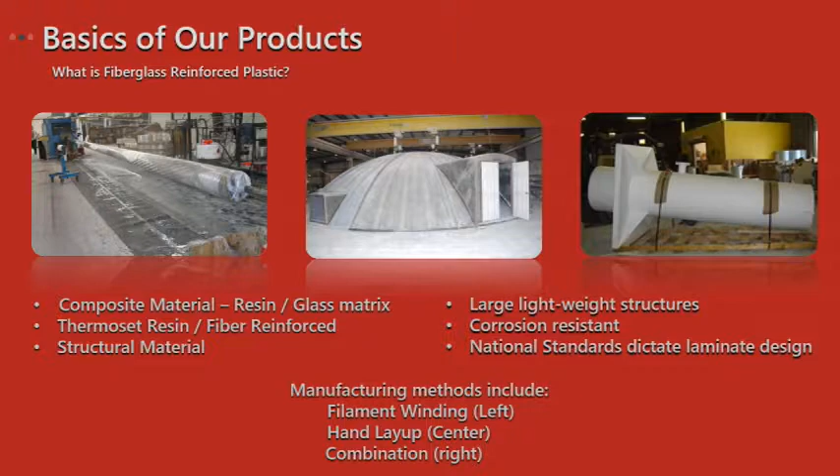The photograph on the right is of a combination of the two. You've wound your pipe, which becomes a stack, and you have a hand layup operation which has created the curbing and gusseting for the same.

Thermoset plastics essentially are resins, as we talked about. There are 5 families basically of resins: phenolics, epoxies, acrylics, isophthalics, which are polyesters, and vinyl esters. Vinyl esters are typically what we will be looking at using on most projects.

The reason for that: vinyl esters are very, very good in terms of structural capacities. They're durable, they can absorb a lot of punishment. They're lightweight, and they give you that lightweight to strength ratio.

Of course, two things you always have to specify in a spec or in any project: whether there are temperature considerations or a fire retardancy that's necessary. The reason for that is we will have to take a look at what resin should apply and be used for any given scenario or situation.

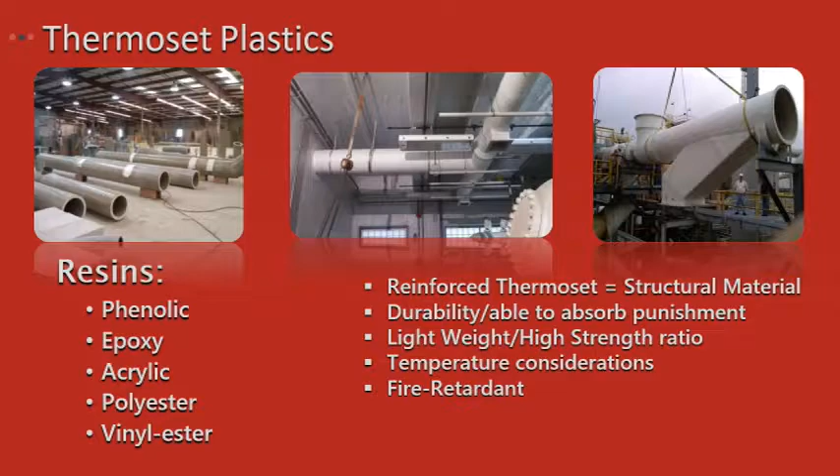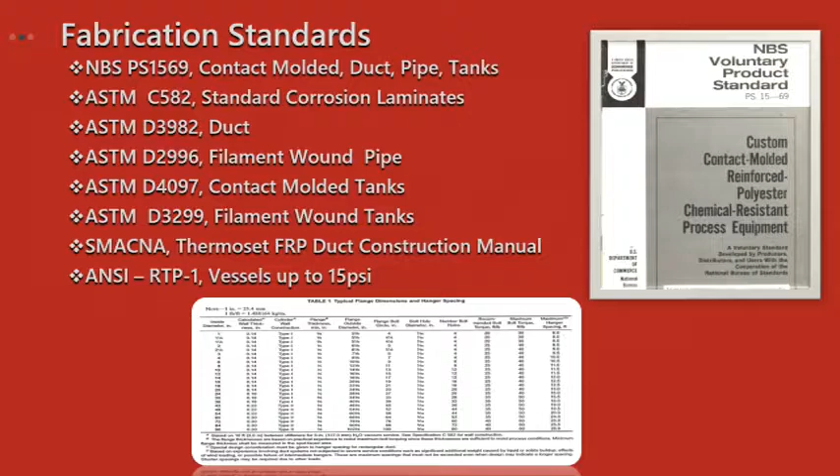Fabrication standards - as I said before, we build all of our products to national standards. The oldest being the NBS PS 1569, which was essentially an all-encompassing standard for fiberglass ductwork. The ASTM C582 is the most general of the ASTM standards relative to fiberglass. From there you get into more specific and specified situations and conditions that the standards address, whether it be tanks, ductwork, etc. One of the latest standards we build to is RTP1 for vessels.

Laminate construction. Laminate construction is comprised of two parts, a corrosion barrier and structural layers. The corrosion barrier is essentially made up of a veil, which is resin rich to the point of approximately 95%. Then that's backed by 2 layers of chopped strand mat, which again, you're looking for a resin rich surface.

So you're going to add 75% resin to 25% glass in those layers. That resin rich surfacing is going to protect your fiberglass from the chemical environment that's inside of the tank or the ductwork. Now, you may also, depending on the chemical, have more layers of veil added, but that typically will not be the case.

The structural layers are typically a 60-40 mixture of resin to glass, and you will usually have chopped strand mat, if not all the way through it, certain layering, and then added layers of either a woven roving, a 24 ounce in most cases, or a unidirectional glass. That's applied if you need strength in a single direction, as with a stack.

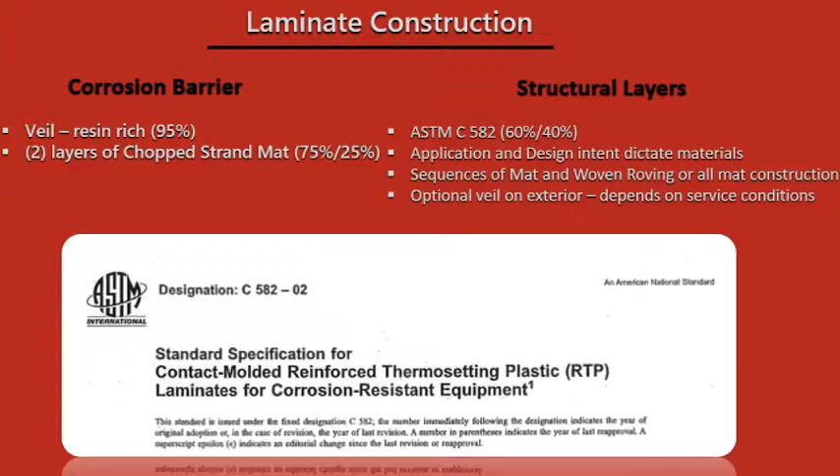Types of projects and sources.

What we typically look for are markets such as water, wastewater areas for municipalities, chemical and manufacturing plants, and acid plants on the industrial side. We also try to look for pulp and paper opportunities as well as food. Food's a little tougher, there's far greater requirements associated with that. However, if you have any of these types of markets open and available to you, typically you'll be able to find some type of fiberglass product that they will be periodically needing.

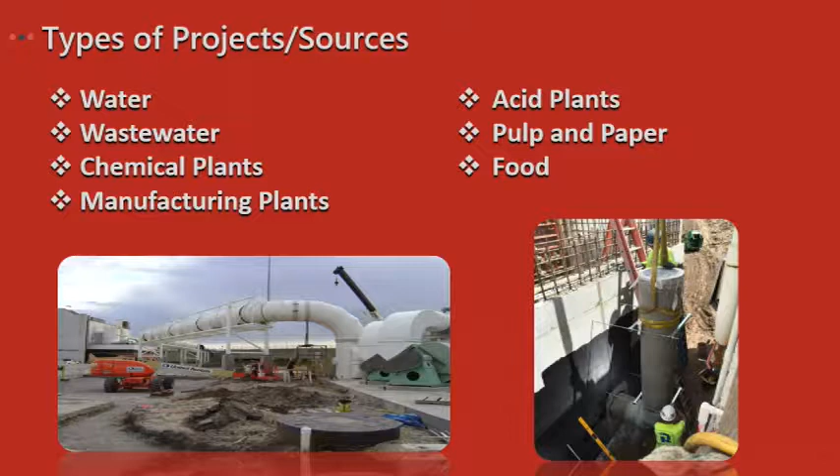The photos below are both of a wastewater treatment plant. The photo on the left is of the Des Moines wastewater treatment plant. That's 5-foot diameter duct that rises up and turns and runs horizontally through a bridge work. Those are 20-foot sections that are flanged and have flex boots attached to them, which allows the duct to grow and shrink depending on the temperature extremes. That duct was put in approximately 11 years ago, and it still looks as good today as it did the day the contractors installed it.

Contacts. As with most things in life, it's not just who you know, but also who knows you. What we're talking about are those relationships you may have with engineers or contractors where they know and trust you, believe in your company, and believe in your product lines. Those are the type of relationships Minoxidant wants to encourage and utilize for the sale of our products. If you have those relationships in place, it's much easier to have knowledge of any upcoming projects before everybody else does.

So what we want to try and get into, or who we want to see, are project engineers, estimators, anyone within an engineering or architectural office who is in charge of spec creation. We would like to get Minoxidant spec'd into each and every project we can.

Another good source would be contractors. If you have a solid relationship with contractors, they oftentimes will utilize your product lines even if you didn't necessarily win the bid.

And finally, trade shows can be useful at times in terms of making new contacts, maybe with an engineering company that's outside of your specific area, but you have an ability to bid some of their projects or get some of their work. Maybe they're doing a job in your market, even though they're actually physically headquartered someplace else.

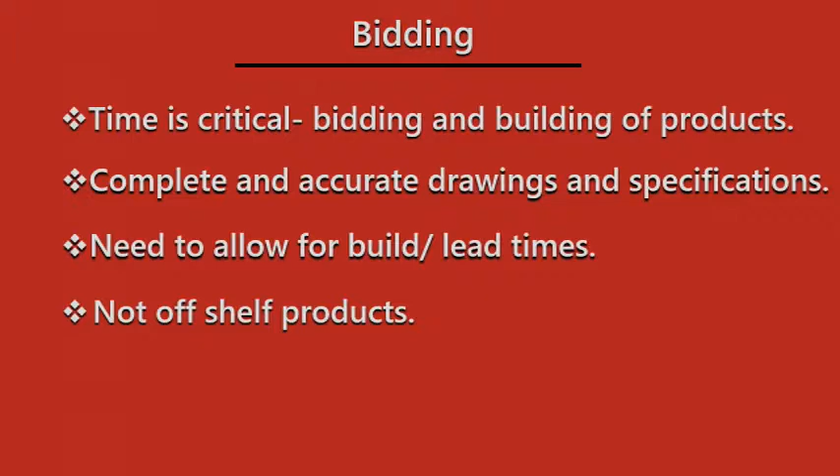Selling points for the Minoxidant lines. Obviously, we've talked about corrosion resistance. That is primarily the markets and the product benefit that we look at for the majority of our products.

They're also watertight. One thing to remember, as we talked about before, these projects are typically one of a kinds. It's a proven and durable product. Fiberglass has been around since the 50s.

Typically, once you sell these jobs, you're not going to get a lot of repeat business out of them because they are a long life product. You're talking about 20, 30 years of life in some of the tanks and ductwork that we have sold and put into production.

We also offer factory manifolding, which is something that a lot of the competitors don't. They'll sell the pieces and parts and the sticks of duct or pipe, but the contractor himself has to put all this together, and the contractor also assumes liability for that. So if we can pre-manifold in up to 20-foot lengths some of the ductwork or some of the componentry, that cuts down on a lot of the labor that the contractor has to do.

We have LEED compatible joining options for some of the above floor air ducting or lab ducting. So you could take advantage of that as a competitive edge versus anyone else that's in the market.

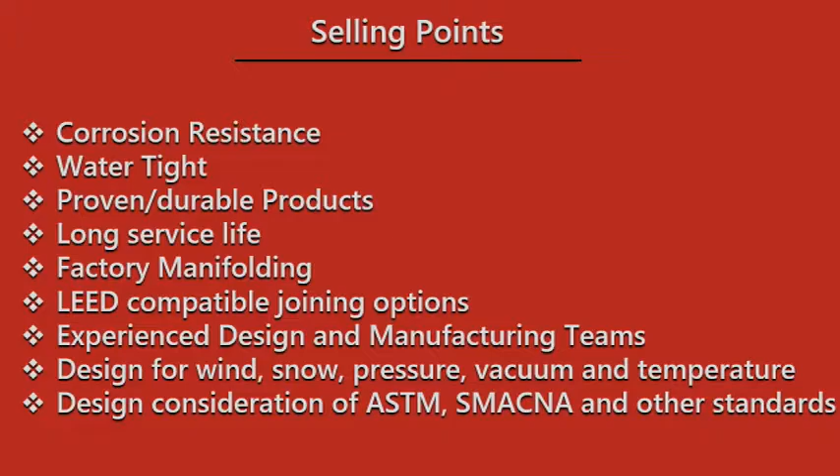We had talked about trying to get the Minoxidant name into specifications. Some of the things that we can assist with is interpretation of the standards, the ASTMs, etc., in terms of translating that into a specification, a product specification.

So things such as wall thicknesses, flange thicknesses, whether or not it should be a class 1 product. We can look at all of these things as well as others and assist the engineers with putting out a product in terms of a spec that truly addresses what they're trying to achieve, what the customer's end goal is.

Many times we'll see specs that come out with information that contradicts itself. That's frustrating, and that also opens up a huge opportunity to misquote a job. If they're looking for class 1 duct, but they spec a resin that's not going to get you there, so to speak.

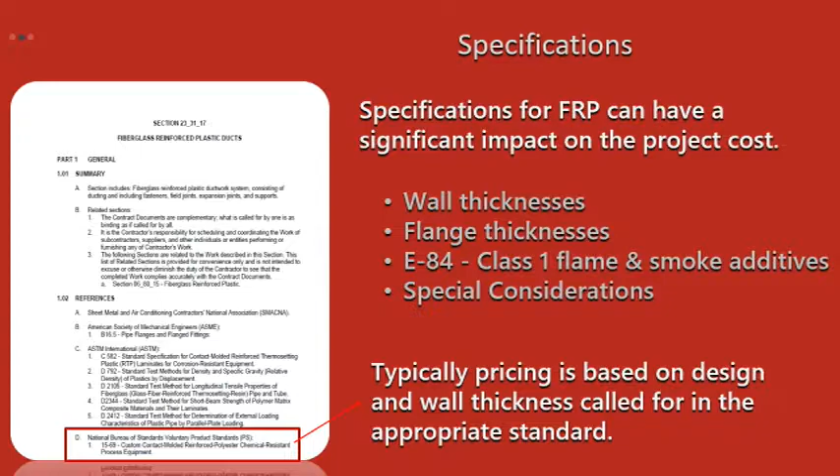If you bid it as a class 1, but somebody else bids it according to the resin, they may wind up with a cheaper bid or estimate and then try to sort out the details after the fact, or deliver a product that doesn't meet the requirements that were originally intended. Then you have an unhappy customer and they have a product that they have to use unless they reject it, obviously, but you may not be able to get back in the door and say we can provide you with what you really need.

So who is it that creates these specifications? We had talked about some of the architectural and engineering houses and the staff that typically goes after this. You'll have engineers at times. Typically you're going to find somebody like an engineer in training that's being tasked with pulling boilerplate type information together.

And since they're a relatively new engineer in whatever industry it happens to be, they typically go a little bit overboard maybe with some of the boilerplate information. And again, that gets back to seeing the spec or being able to sort through everything and tell them what can or can't apply and how it fits and the reasons why.

Again, if we can work with you, our reps, in terms of sharing that information or give it to you so that you can look like you're the expert on site, that helps everybody in the long run in terms of securing those projects and building that trust that we had talked about before.

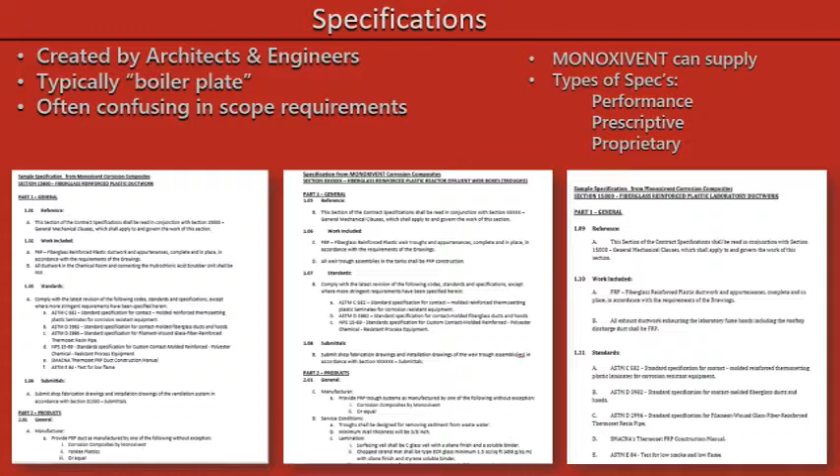We can supply specs to the customer. We have boilerplate specs, so to speak, that we've written that you can access online and download. If there's something more specific needed, we can also provide that.

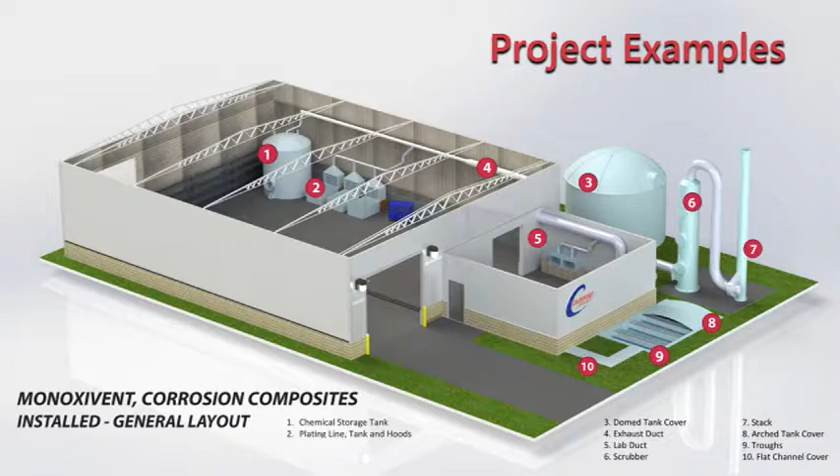Let's talk for a second about the product lines, Monoxivent markets. Essentially, there are 5 lines in the FRP area. You have underduct for HVAC, underduct VE or vehicle exhaust, for extracting automotive fumes from a building, carrying it underfloor and out through an exhaust system.

You have your hybrid lab duct. You have your corrosion composites and your industrial composites.

For most industrial applications, they're OEM, one of a kind, and we'll have something specific to design for. On occasion you may cross into corrosion composites product areas for your industrial clientele, and rarely you may wind up with a hybrid lab duct being utilized by a municipality or a chemical industrial company. So we can fall back or utilize some of these other product lines to also service the same markets or customers.

Let's drill down and take a look at some of the specific product lines that Monoxivent can supply. Ductwork is obviously a bread and butter line for us. We build to standards like PS 15-69, ASTM 582 or 2996, to name a few.

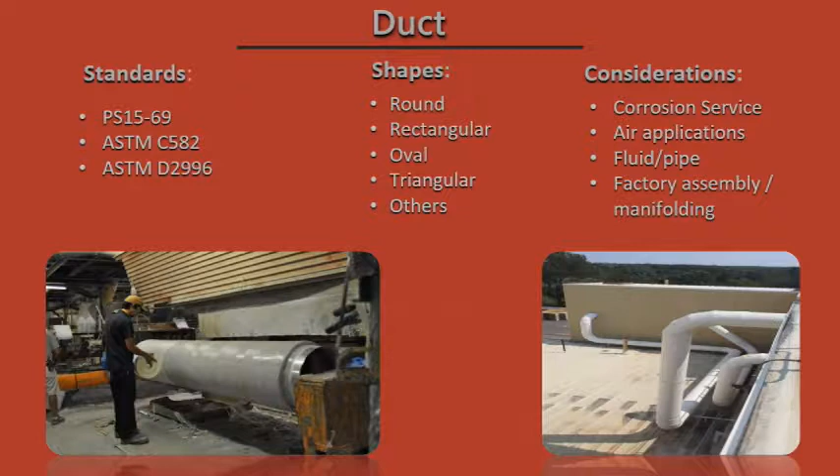Photos on the bottom of the slide: to the left you can see a gentleman applying a veil to the outside of a length of duct as it's on the mandrel being glassed. The photo on the right is of an ammonia recovery system. In the background, in the tan building, are a couple of scrubbers that the ductwork will tie into eventually. So the duct is routed throughout a couple of different buildings for this process.

Another product line we get involved with is stacks. A little more difficult for us because we don't have an on-site engineering staff that can address these, but we do have to be aware of considerations such as seismic considerations, wind load, and how this is going to be mounted.

Is it a base mount? Are you going to tie this within a structure? Is it going to be guided? Things of that nature. Also important is the chemical environment - what's going to actually be going through this stack, and what's the speed at which you want to exhaust the air?

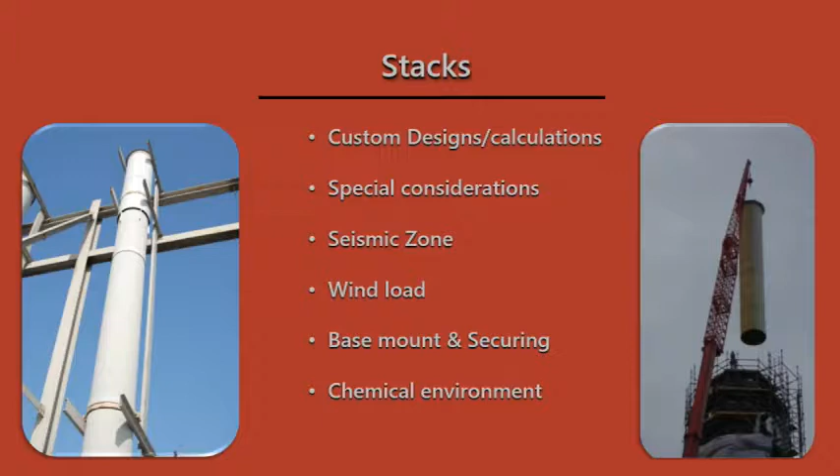The photograph to your right is a stack liner that we developed. We had 3 stacks at Michigan sugar plants that needed work done - either replace them or find a way to save them. What we developed was a liner system where you have sockets on the top side of the liner segments that align themselves and seat as they're installed in the stack. And then the very top section has a flange that's bolted in place.

Tanks are another product line we get involved with and provide to our customers. Again, the standards apply - 582 of the ASTM line, 3299, 4097, and also RTP1. We are not certified to build an RTP1 tank; we can build it, we just can't stamp off on it.

Some design considerations: sizes, pressures, vacuums - your performance issues. Chemical environment is again very critical. We do not skimp or cheat on building tanks. We will not give an appropriate liner and use submaterial for the structural layers. Whatever is specified is what you will find throughout the build.

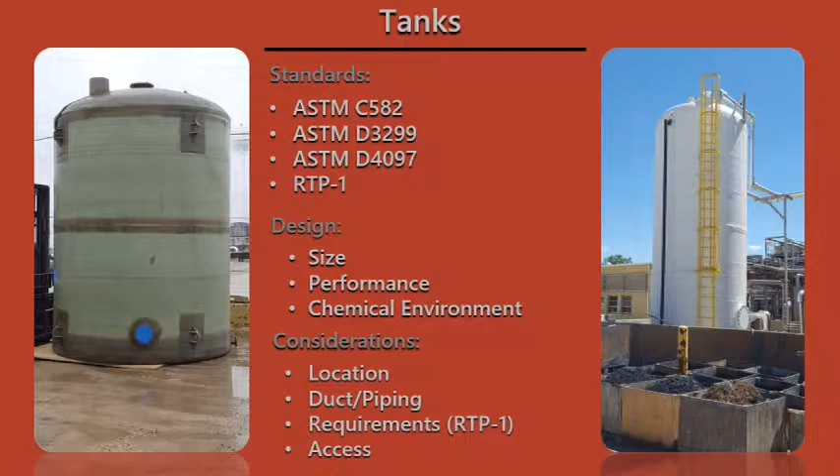Plating lines are an excellent opportunity to showcase what fiberglass can do. They can become a complete turnkey system, so you can have your tank, your hood, your duct, your exhaust stack, even your fan if necessary, all made from fiberglass.

We can embed steel or other structural supports into the tanks to assure that over time any flexing or chemical attack of the tank at the corners will not become an issue.

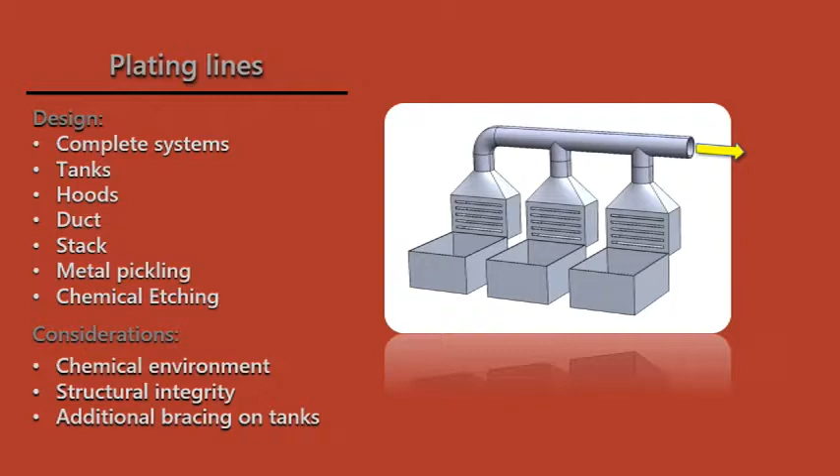Earlier we mentioned that laboratory duct could be a possibility within the industrial fiberglass area. What you may run into is a situation or project where it's within a building such as an institution, a school, something along those lines, and they want a corrosion resistant interior, yet they need the class 1 finish on the exterior. So we have a dual laminate in essence. We can accommodate that; it's very easy for us to do.

Also keep in mind we can supply this in a single wall or a double wall insulated, and if necessary we also have lead methodology in terms of joining the ductwork, which you can ask about. We'd be more than happy to share that information with you.

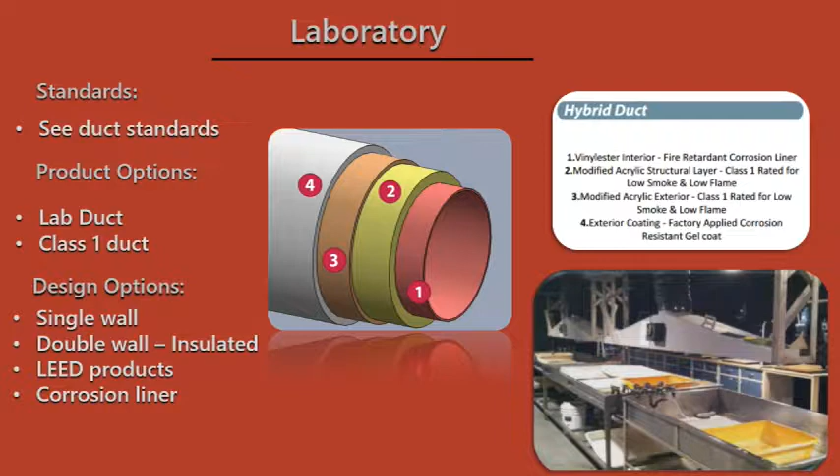So again, we're looking at what the environments are. We have to consider how pure the air needs to be as it exits the scrubber, and also look at what's tied to it, either in front of or in back of it. So we can design any system in terms of the actual fiberglass componentry, but we team with whoever the scrubbing system designers are to make sure that it's going to work for the customer.

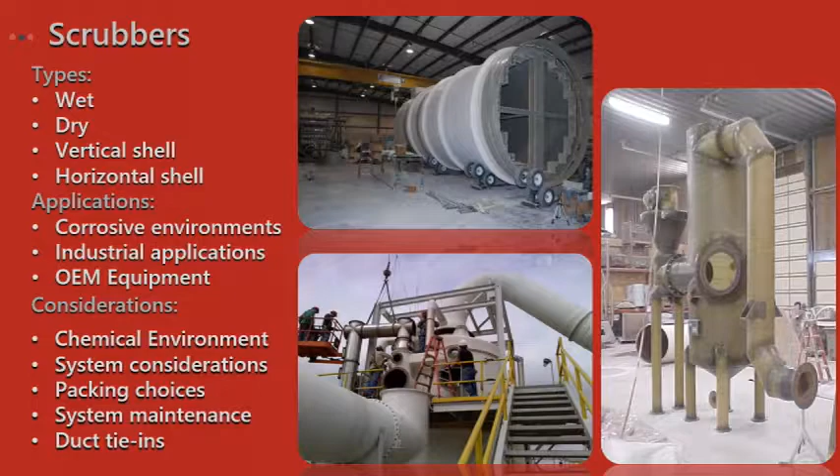Troughs are something that periodically we'll be asked to build. Typically they're going to go into water plants, or they may go into an industrial facility. We can do standalone systems, flanged systems that tie lengths together, or we could do an in-floor system and have a grating system put over the top of it. We also build things such as weir plates.

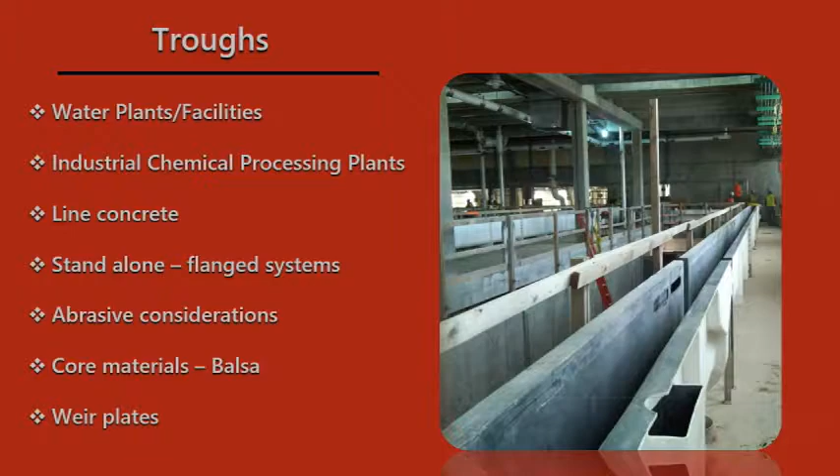Any of the standalone troughs will typically have some type of structural reinforcement added to them, such as balsa wood or maybe a foam, so that again it's a lightweight material but very high strength and very durable. The photograph you see in this slide is of the Calumet water plant in the Metro Chicago area. We did 4 120-foot runs for their system, and we added an abrasion coating to the inside of the troughs. So these are extremely durable, and should hold up without a problem for many, many years.

Flat covers are a classic FRP application. Again, lightweight, very high strength. Core materials typically that we'll look at using on the covers would be primarily balsa wood, but you could also use plywood or particle board. You can also use foam or some type of polymer or steel if there's a structural integrity issue.

One of the criteria for the covers was it had to be light enough that a man could take it off and put it back on by himself. We accomplished that through the balsa wood. It also had to be durable enough that you could drive a lawnmower across the top of it. Again, we accomplished that through the matrix of fiberglass and resin, and also embedding the balsa within that.

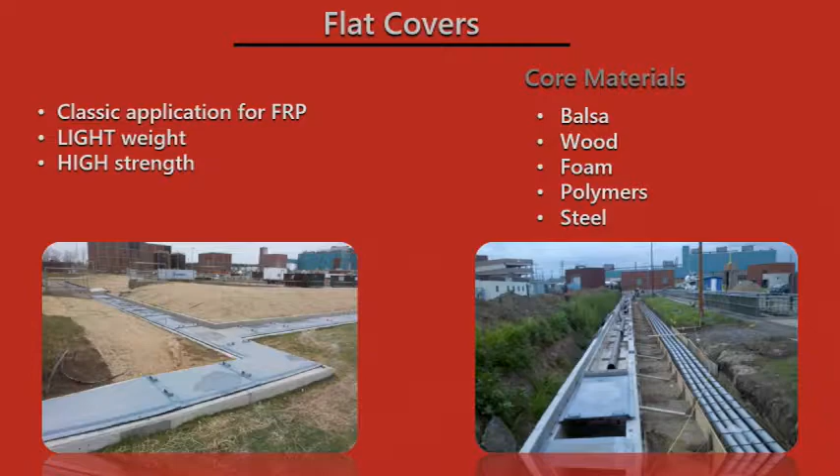Dome covers, much the same as flat, typically will utilize some type of core stiffener, whether that be inserting a balsa interior layer or developing some type of shape or profile in the mold itself that translates to the part. So once the part is pulled, it has some type of rigidity factor to it.

Domes typically are custom build products. We will turn a flange up at the outer edge for a stiffener, and we will segment these in sizes that make sense in terms of shipping to a job site. So if we can get it on a truck, we can send it.

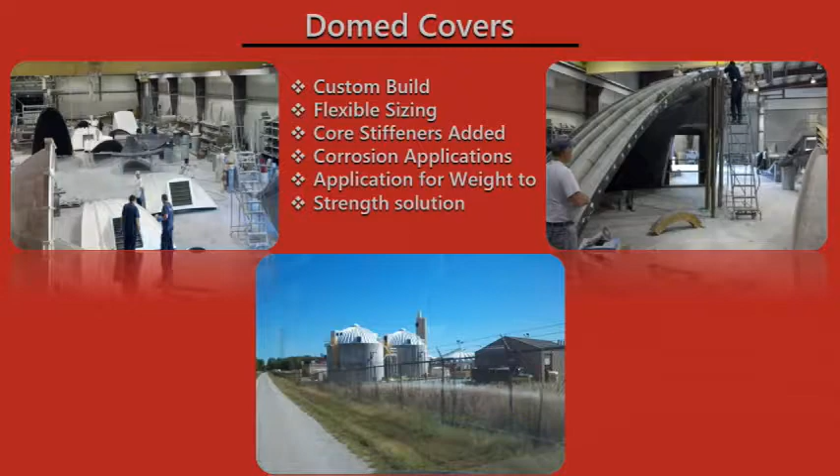We've done a couple of these systems for them in Kentucky, also sent one to Holland, and we've done various sizes of these for them through the years. It's essentially a CPVC powder operation, and 316 stainless was being used in the plenums prior to the fiberglass, and the 316 stainless was being attacked and corroding. These systems have been in place for close to 30 years, and they still operate the same as they did day one.

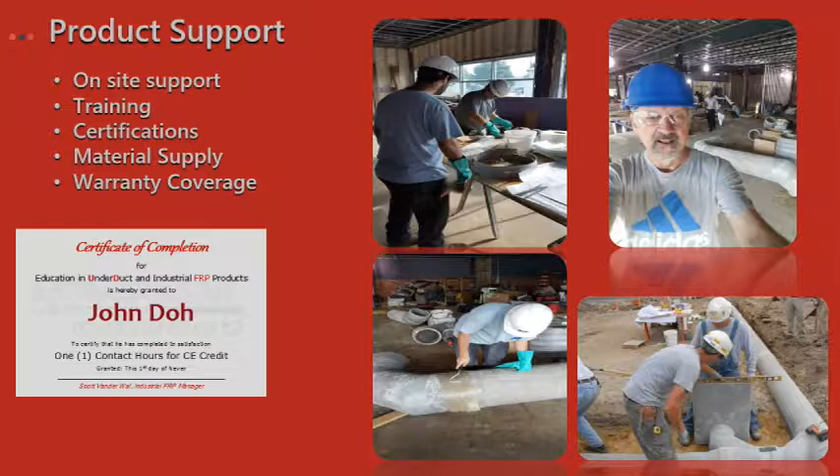One of the things we would like to see more of from our staff as well as from our reps is follow-up. Very basic: if we don't win a bid, why didn't we win it? I know this can be time consuming, but sometimes it's amazing the things that you can find out.

You can find out who your competition is in that market. What's the pricing level? You may have gotten beat this time, but if you know where they're coming in on jobs, we can go back and take a look at the next project and make sure we're more competitive. What's the market? Is there anything going on? Is there tons of work going on and you're just not aware of it? What can we come away with? What is it we can glean or learn from any of these situations, any of these projects, win, lose, or draw?